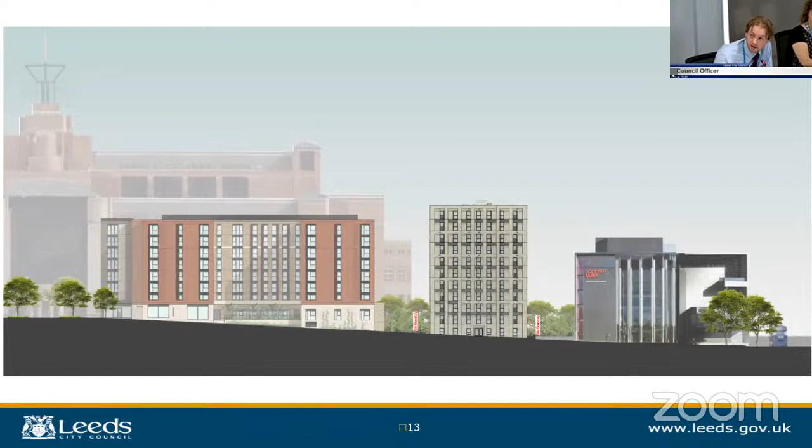So it's the middle drawing in that plan.

And I've included this image as it shows the moulding detail on the infill panel. The applicant is committed to achieving a window reveal depth of 215 millimetres. And I should say we work closely with design colleagues and they consider the latest proposals acceptable.

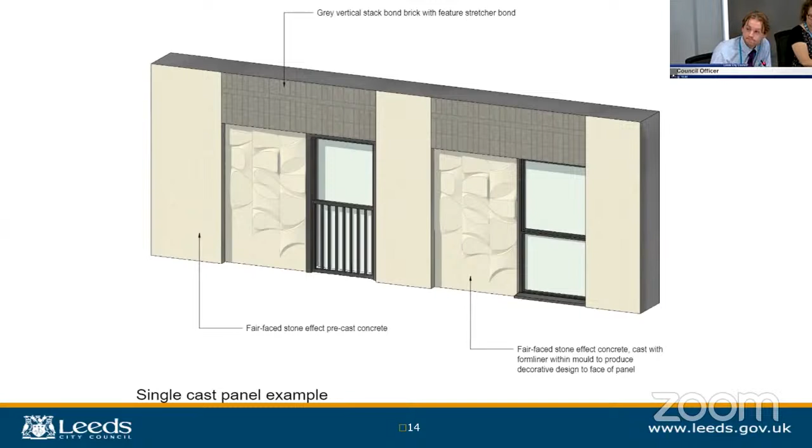As already mentioned, this is a small and constrained site with development on all sides. As such, the separation distances with neighbouring buildings is tight. This is shown in the above image. The application site is depicted in the bottom right-hand corner. You can see there's a red line marking out the application site.

The distance to the Soyo apartment block B is 13 metres and the distance to the facing elevation of Northern Ballet Centre is 11 metres. There is no policy on minimum separation distances between buildings in the city centre, but there's an expectation that development will reflect the character of the area. As you can see, the Soyo scheme includes gaps of 12 and 13 metres to the north.

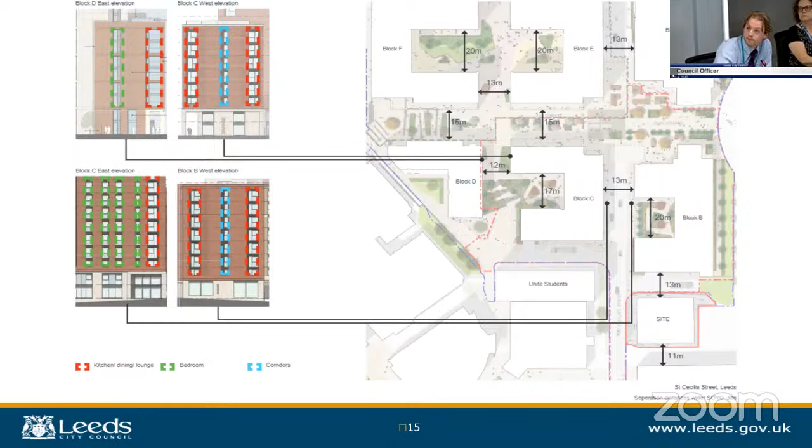Oops. It doesn't seem to be appearing, but there were a couple of photos I took of similar relationships in the city centre. I don't know if it's actually maybe the next slide along. Let me just have a quick look to see if it's there. Ah, yeah, here we go.

So there are also other examples of similar distances between similar storied buildings in the city centre, including Belgrave Street, where the distance between Havana Residence and Simmons House is 11 metres, and between residential blocks A and B at Mustard Wharf, where the gap is 10 metres. There is evidence, therefore, to suggest that future occupants would be accepting of these relationships as part of the wider established character of the city centre.

Moreover, it is considered the potential for any adverse impact is mitigated by the large windows to habitable rooms, which would help to maximise daylight, and the fact most living rooms would be dual aspect and benefit from views looking east and west, where there isn't the same privacy conflicts as shown in this floor plan.

The applicant has also submitted a daylight and sunlight report, which concluded that in the context of a dense urban environment, the impact on daylight and sunlight amenity to neighbouring residential properties would be appropriate, and the development would provide acceptable sunlight amenity.

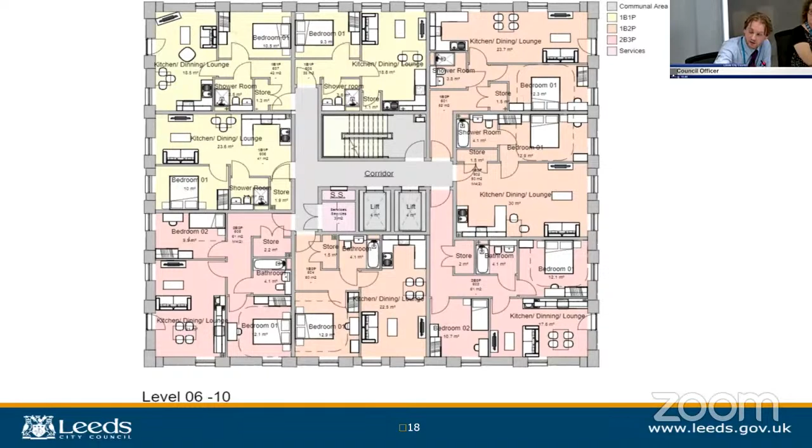I'll go back to the slide that we skipped over, because I just want to touch on the relationship with Northern Ballet Centre.

In terms of the impact on Northern Ballet Centre, I had the chance to be shown around the building this week and looked into all rooms which would face onto the proposed development. It is considered most rooms wouldn't be significantly affected from overlooking because they either serve as offices, which are regarded as a less sensitive use, or are fitted with opaque glass.

However, there is a dance studio on the top floor, which is worth considering in a bit more detail to ensure members are fully informed.

I'm afraid this slide doesn't appear in your printout since I was only on site this week, but the image on the top left-hand corner shows the view from the dance studio. You can see that the top half of the window is transparent with the bottom half fitted with obscure glazing.

The affordable housing block would extend along part of the length of the dance studio and 4 windows would face onto it. This is depicted in the right-hand image, which shows the window arrangement of the proposed development superimposed on the facing elevation of the Northern Ballet Centre.

The facing windows to the dance studio are highlighted red. The top 2 windows would sit above the dance studio, with direct views only possible if a person is up next to the window looking down, and the bottom 2 windows would face onto opaque glass. Officers therefore consider that there is unlikely to be a significant impact in terms of overlooking.

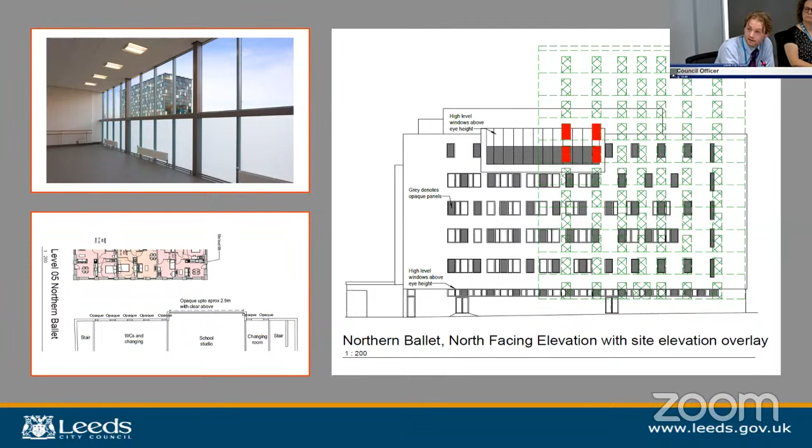In respect to the ground floor, this would contain a reception area, bike and bin store and plant rooms, as well as 3 apartments which would benefit from a small private terrace. Officers initially had concerns about the level of outlook occupants could expect from these apartments, considering they're at ground floor and there is car parking and service roads on all sides.

Let me come on to some section drawings. The applicant has since provided section drawings which show the apartments would likely have an adequate outlook because of differences in ground levels.

On the southern elevation facing Northern Ballet, the apartments would sit on a raised platform with ground level slowly rising as the site slopes northwards. Most of the boundary treatments would have a maximum height of 1.1 metres, which would allow views over the top and the sense of sky and openness beyond.

Where the retaining wall is higher due to ground levels levelling off on the northern side, the affected flat has an alternative outlook to the east side, which would provide acceptable outlook and daylight to the living area.

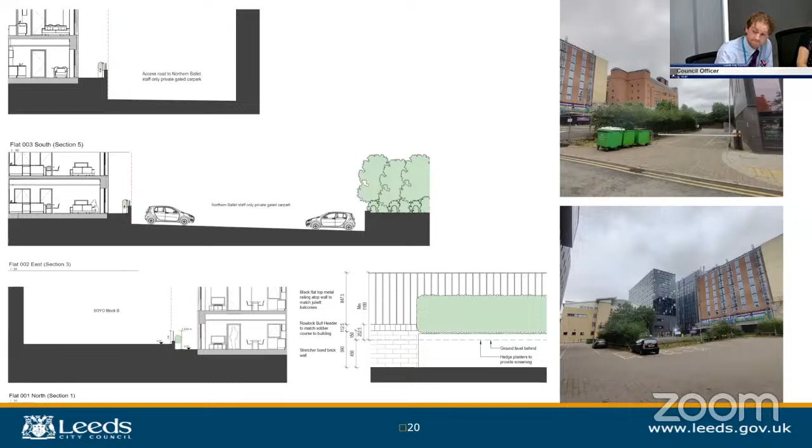Although the development is not required to provide any open space since it falls below the 0.5 hectare size threshold set out in Core Strategy Policy G5, it is recognised the provision of balconies and/or a roof garden is desirable. These features have been considered through the planning process.

However, the applicant argues this is not possible due to cost and management concerns. Despite the lack of on-site external amenity space, other than the small terraces serving the ground floor apartments, residents would benefit from good access to green space within the wider Quarry Hill site, including 0.9 hectares of public realm being delivered as part of the SOYO scheme, which involves a network of interconnecting avenues and courtyards.

Most of the areas would be publicly accessible 24 hours a day. However, the courtyards would be closed between the hours of 11 p.m. and 7 a.m. to protect the privacy of occupants of the surrounding residential blocks.

Furthermore, there are public parks within a 5-minute walk of the application site. This includes St Mary's Park to the north over York Road and green space off Railway Street to the south. The parks provide residents with additional green space functionality and offer a good alternative to the more formal spaces set out within Quarry Hill. The green space at Railway Street also includes an outdoor play facility.

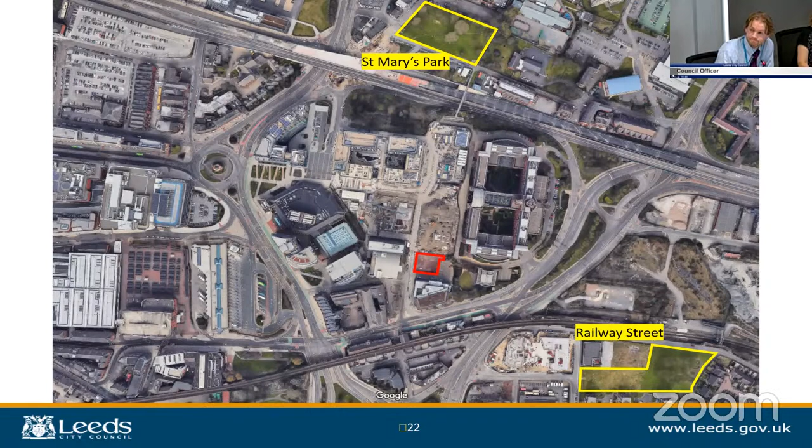On the issue of housing mix, the applicant proposes the following: 46 one-bed, 28 two-bed and 4 three-bed. In percentage terms, 3 beds represent 5% of the total number of units. Although not a policy requirement, since the policy only asks for an appropriate mix, this is clearly below the preferred minimum 3-bed target of 20% set out in Table H4 of the core strategy.

On this point, officers have sought demand data for 3-bed affordable housing within Leeds city centre. In the absence of an up-to-date strategic housing market assessment, which is currently being prepared, data from the annual Leeds Housing Register report for 2022 to 2023 has been taken. The data is on a ward rather than area basis, and since the site borders both Burmantofts and Richmond Hill and Hunslet and Riverside, it was considered reasonable to present data from all 3 wards.

Page 19 of your information pack, paragraph 8.3.8, shows the number of applications for affordable properties broken down by bedroom requirement. The percentage of applications for 3-bed properties ranges from 11.7% to 17.8% across the 3 wards, which is proportionately more than the 5% being offered. However, the data also shows that the greatest demand is for 1- and 2-bed properties, with almost 80% of all applications across the 3 wards for 1 and 2 beds.

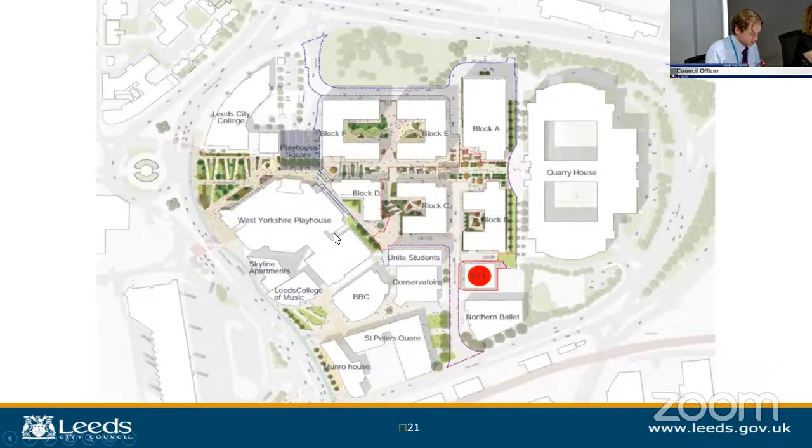I don't know if you could show that on the site plan, John. Yeah, Lewis, if you wouldn't mind bringing up the PowerPoint again, I'll get to that slide. See if I can move it across - it's the ground floor plan, Lewis. If you could just toggle through. Yep, that's the one, yeah.

So it would be this area, wouldn't it? I think where you're proposing some - it just says scrub planting on the northeast corner, where you've got a bit more space to introduce some landscaping. There's also planting around the boundaries as well, so that gives the ground floor units protection on the boundary treatments, to look out on some green areas. We appreciate the green space issue, but with the constrained site and the lay-by, and maintaining the footpath widths for highways requirements, we do have a little bit of planting around the wind baffle as well, just to soften the base of the wind baffle.

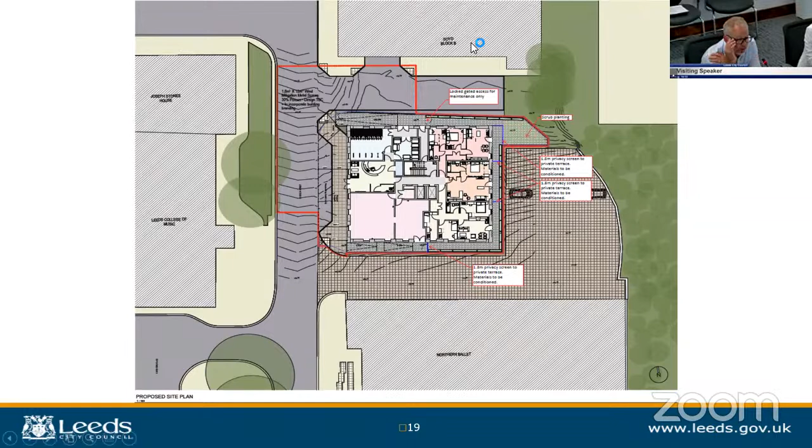If I can add to that, Chair, I think the previous plan shows the site in the wider context. I suppose it's good to make the point that this is almost a piece in the jigsaw in the wider Quarry Hill development, which obviously is now called Soyo. There's been a lot of public realm enhancements as part of that overall scheme, and we're connecting into that through the resurfaced St Cecilia Street, which will then feed you into the wider public realm within Soyo.

And there's a hierarchy of spaces in Soyo that will serve a range of functions, including the more intimate, tranquil spaces within some of the residential blocks. Soyo Block B to the north of us has got a residential courtyard that's got public access during the day, so that will provide a bit of a more tranquil environment.

And then as you filter into Soyo, you've got the main east-west street, which is the bustling, lively public realm area. It's got some functional hard landscape materials as well, which can be used as informal play space. And then you've got Soyo Square between blocks A and B to the north. So there is accessibility to public realm on your doorstep, although we're not delivering it directly on our site because it is quite a constrained plot.

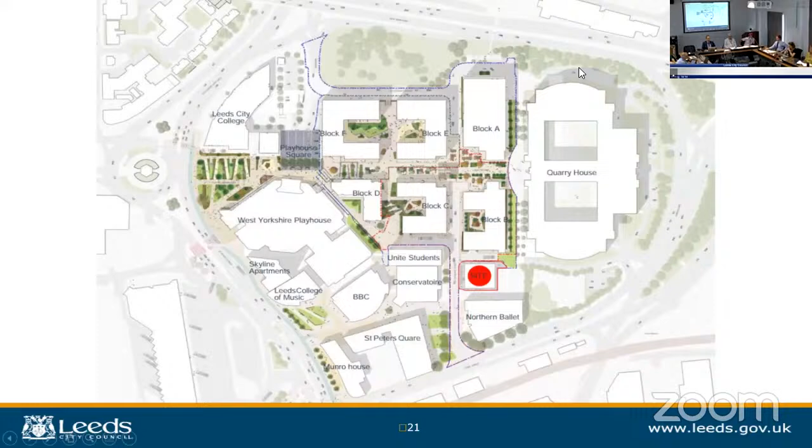Thank you for that. Councillor Blackburn, please. I think... I thought we were having the same trouble not turning on.

Picking up on what Councillor Khan was talking about, there seems to be plenty of green space in the overall area, but it doesn't seem a lot there for children. I know it's been mentioned there's a park, which I doubt has any facilities, just over bordering Munro House. Councillor Khan nodded to that effect, and by the railway there's some facilities, but what facilities have we got for any children that might be in this development, and how far away are they?

Do you want to come in on that, John? If you can. There seems a hesitation, so.

Sure, I think it's a fair point that Councillor Blackburn raises. As shown in the image, you have got that play area at Railway Street, which is a 5-minute walk away. It's a city centre environment, so sometimes getting access to play is difficult. But there's some more seating areas within the Quarry Hill site that could perhaps double up as places for children to enjoy, and some of the courtyard space as well.

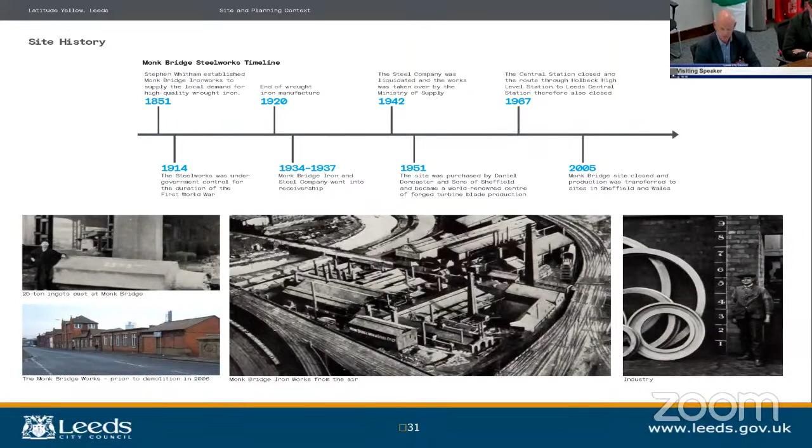In terms of the site history, I won't labour on this, I'm sure you all know, but obviously it's the old Monk Bridge Steelworks. The only thing I would say here is that over and above the extensive surveys we've done to make sure the site is actually deliverable, we have designed the building in such a way that we try to nod back to the existing site use in terms of the aesthetics, and my colleague David will touch on that when we get to that point.

In terms of the site context analysis, you were there today, so you can see that. What we're just doing here is showing you the site along Whitehall Road from the east, the residential towers that are coming up, and the vacant site that we have and are looking to develop next.

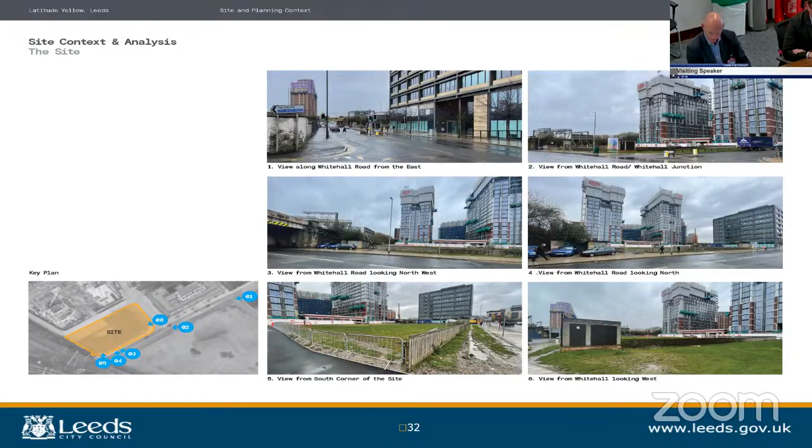This slide shows how the Latitude Yellow site sits within the overall master plan. Latitude Red, as you know, is developed. Purple A and Purple B are largely out the ground and well developed now, and the Monk Bridge site at the back is well developed and largely complete as well.

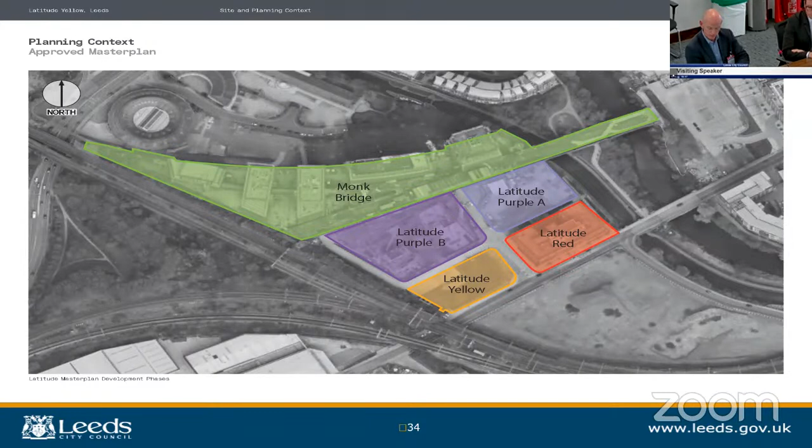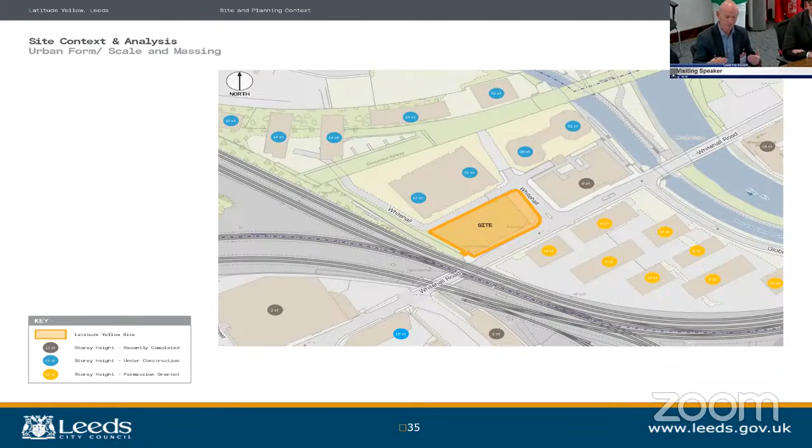In terms of the heights of the buildings, this slide demonstrates residential towers up to 31 stories behind us, and then a mix of 14, 8, 10 all around. What we're looking to deliver here is an office building that is ground plus 11 stories. We previously had an implemented consent for ground plus 9. The building itself, in terms of area, is actually slightly smaller because we're giving so much space away to amenity - the cafe, the shower and changing facilities, the gym, the roof terrace, all of the spaces that we now believe a modern office building requires. So slightly higher to accommodate that, but in terms of net internal area, the building's smaller. We're giving a lot more, but actually making less money for it, if that makes sense.

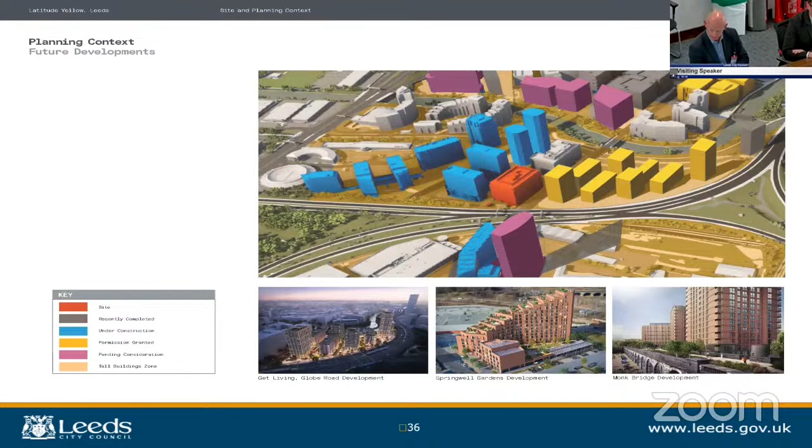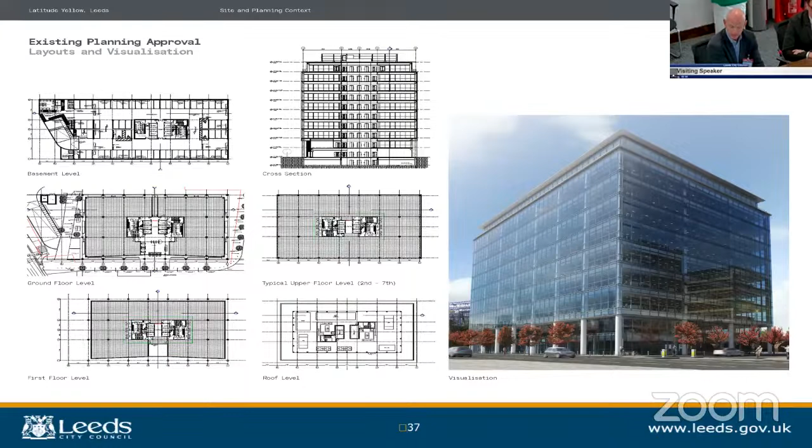This lets you see what the existing scheme looked like - a big glass box. You will not see big glass boxes generally being brought forward by developers anymore, purely because the glass generates overheating in the buildings, which means you need more operational energy to cool them. It doesn't work anymore. So the scheme that my colleague David's going to talk you through, from an aesthetic perspective, you'll see a lot more solidity to the facade, and that's really just to manage that overheating issue that we desperately want to be mindful of and manage to allow us to get the net zero in operation, but also our NABERS accreditation.

Last slide for me is just to touch on the public consultation. We've had extensive public consultation and pre-app discussions with the planning team so far - we've spoken with Leeds City Council planning team, the Civic Trust, local councillors, and we've also leaflet dropped 2,000 neighbours to let them know. The feedback from everyone has largely been very positive, so we have no concerns about how stakeholders feel about the scheme. We hope you feel the same, but David will talk you through that.

Good afternoon, my name is David Shaw. I'm a project architect and project director at Cooper Cromar. I'm conscious that we've maybe overrun our 10 minutes, so I'll make this as succinct as possible.

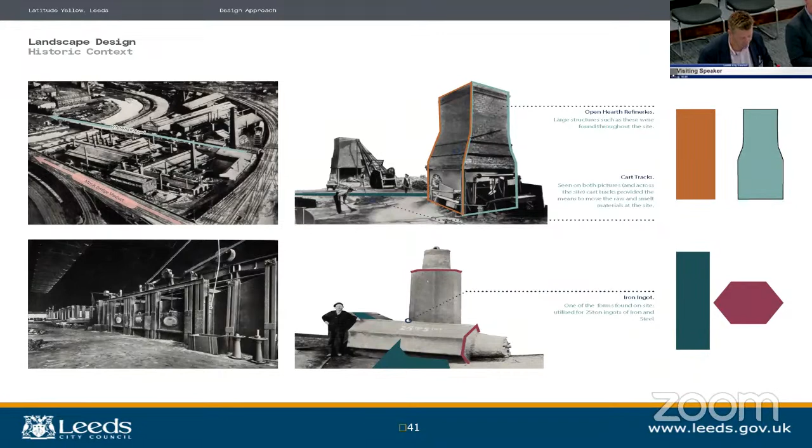The approach to the development draws inspiration and reference from the existing site. It is rich in industrial forms and material - the masonry firing hearths, the cart tracks creating routes to, from and across the site, and the hexagonal iron ingots.

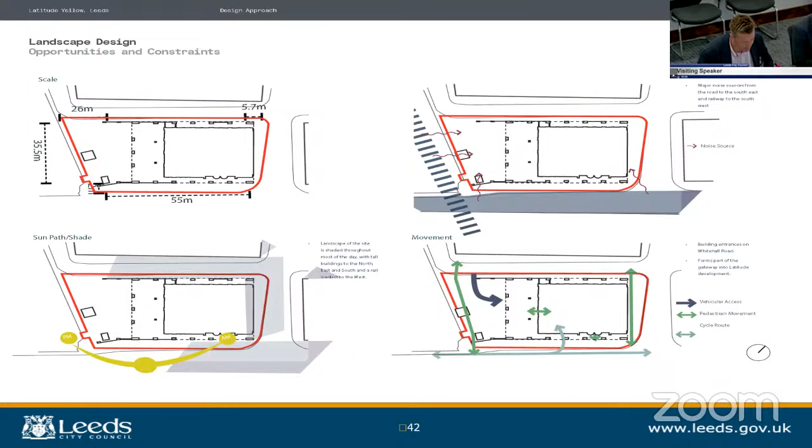The Latitude plot is approximately 35 metres wide by 55 metres long, with the western side following the edge of the Leeds Bradford railway line. Orientated on a north-south aspect, the site benefits from the sun on the eastern and southern facades.

The positioning of the building offers appropriate offsets from the neighbouring developments, either built or unbuilt. On the southern edge, over 17 metres between our building line and the Get Living scheme to the south. On the north edge, almost 16 metres between us and the Purple Bee development. On the eastern and western edges, over 20 metres to the railway line and the Yorkshire Post building. Our strategic approach, pulling back the building from the railway line, is to green the edges, providing shared space on the western edge between the building and the elevated railway line with a mixture of hard and soft landscaping.

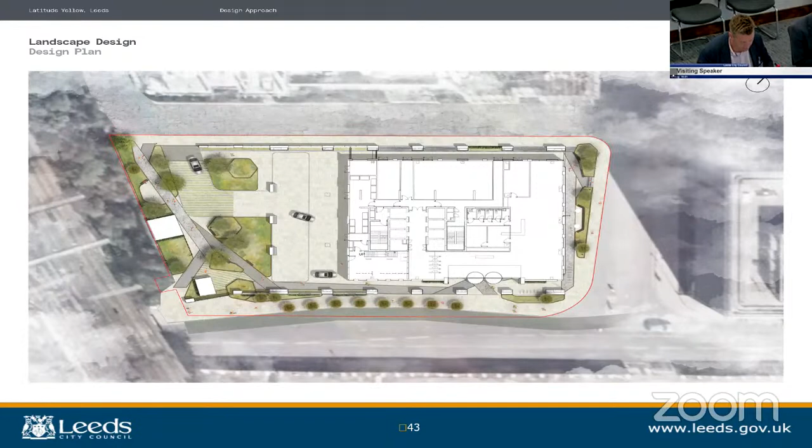The main building entrance is located off Whitehall Road on the southeastern side of the building. Visitors travelling by cycle arrive off the cycle route and into the ground floor cycle store on the west. Pedestrian access is also provided to the eastern edge into the shared public cafe. The western edge affords covered access for 160 cyclists, pedestrians and drivers.

Limited parking, goods, refuse and service delivery are made from the rear Whitehall via the loading bays and the shared access road. The ground floor is set back on the north and south edges in a two-storey colonnade.

The ground floor footprint represents only 30% of the overall site area at ground floor level, and over 40% of that space is dedicated wholly to shared building amenity. Limited ground floor parking, 10 cars and 6 motorcycle spaces, is provided in the undercroft in lieu of an underground basement car park removed from the consented scheme, all promoting active travel.

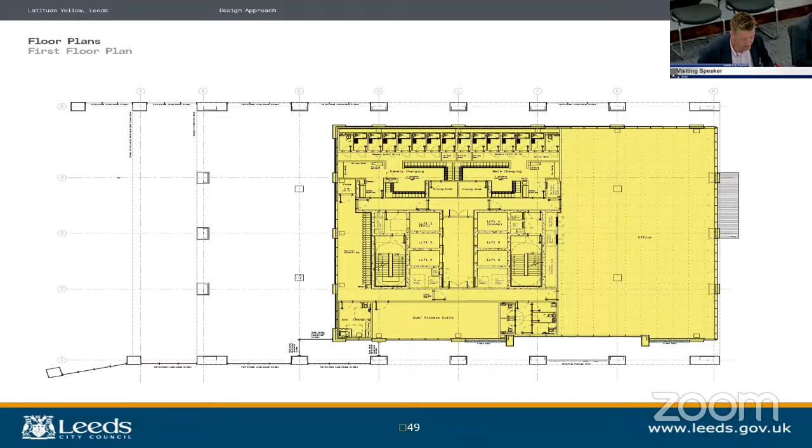The upper floor levels are dedicated almost entirely to Grade A commercial office space, circulation core and associated provision support. The roof level plan offers, once again, further shared building amenity in the multi-use space, the flexible breakout and the external roof terrace, which offers fantastic views at height back east across Wellington Place and towards the city centre.

Green walls and biophilia are spread across the building at the main entrance, in the entrance lobby and on the roof terrace, softening these spaces and adding texture to the building.

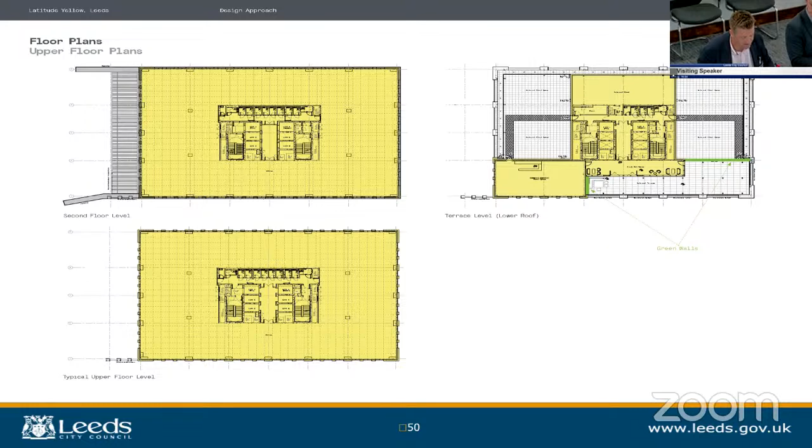Level access and tailored external furniture will ensure a special space in the city for building tenants and their visitors. Tall glazed balustrades will permit views out, but will also provide a degree of protection from the elements.

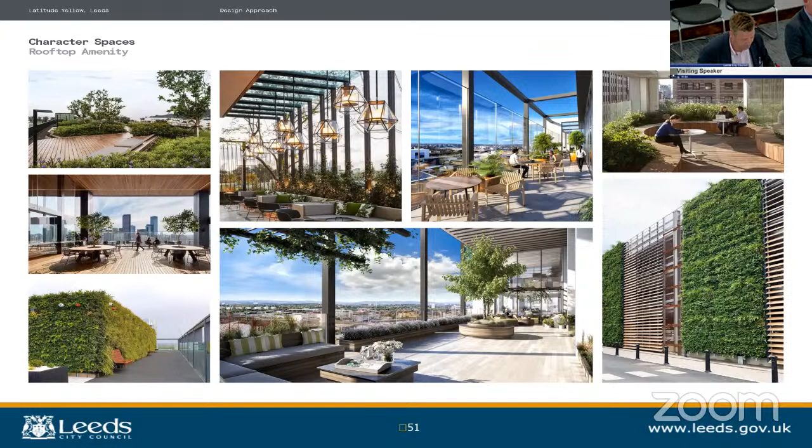The building is arranged over 13 storeys, approximately 50 metres in height. The ground floor and first floor, as we've seen, are almost entirely given over to shared amenity. The omission of the basement has displaced the building's plant over the ground floor and the roof levels.

There are 10 levels of Grade A commercial office space and a single level of flexible multi-use space. Screened plant zones are located cleverly on the north side of the building, away from Whitehall Road.

The building's height draws from the context of its neighbouring properties. The approved Get Living scheme buildings directly south are 18 storeys, with their neighbouring buildings reducing to 9 storeys. This is in keeping with the scale of the Yorkshire Post building and then our building at 13 storeys. The building to the north, Purple B, rises again to 17 and 18 storeys, and on the southwest, Springwells Garden building is 16 storeys.

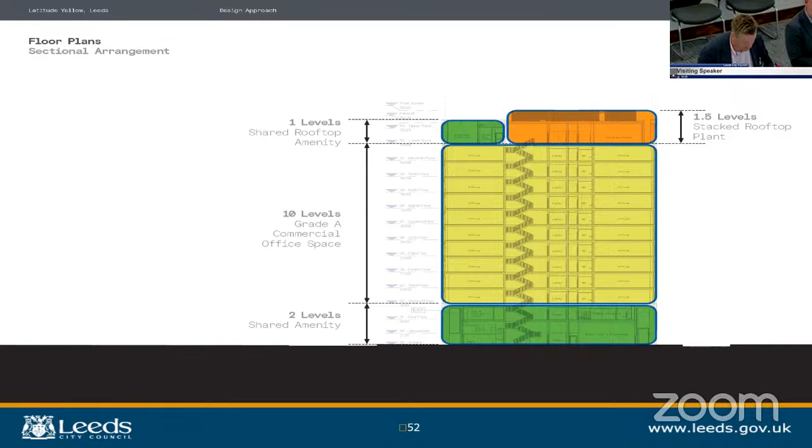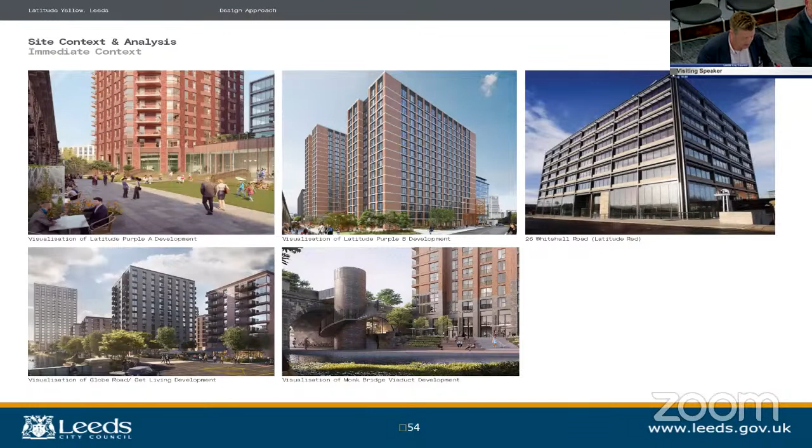The building considers its immediate neighbours, constructed, pending consent, or determined. Our building seeks to complement the rich and diverse mix of architecture in the immediate environment. The wider context of the central commercial district also offers points of interest and reference.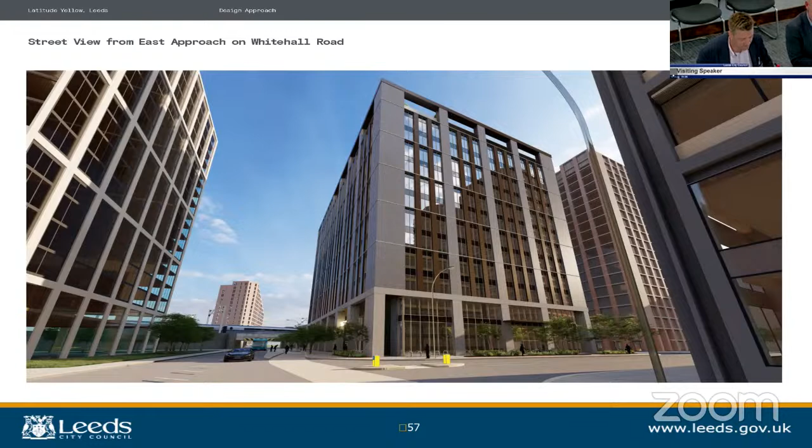Next slide, please. A weighted, regular and rhythmic lower building plinth and frame articulates the ground and first floor setbacks, creating a more civic approach to the street.

Next slide. A simple and elegant upper elevational response is delivered with thin horizontal banding, strong vertical dark masonry elements and lightweight metal infills with an articulated crown detail.

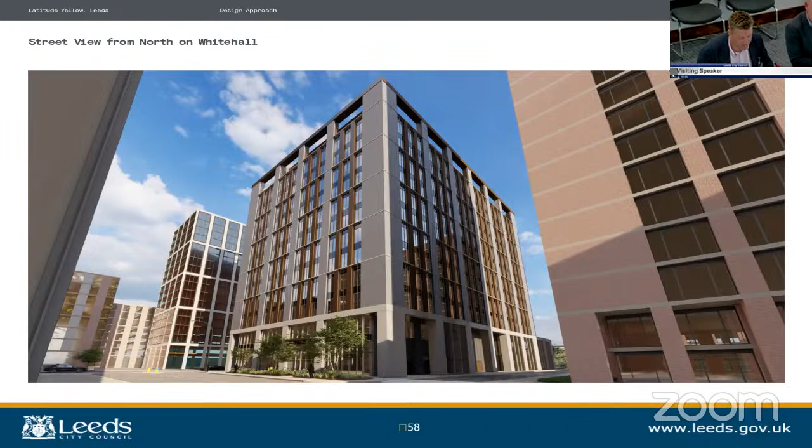Set to a rhythm across the facade, these repeat on a brick, glass, metal, brick pattern with a full brick deep reveal. Next slide, please.

The southwestern corner incorporates metal perforated panels integrated into the overall composition of the building, assisting with wind mitigation.

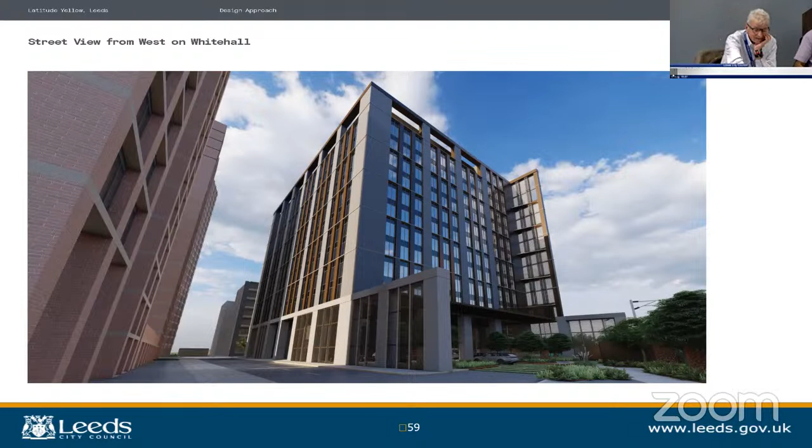Architecturally, our building completes the master plan development with an exemplary confidence. Considered and progressive, it is a worthy full stop to the redevelopment of the former Monk Bridge site in Leeds. Thank you.

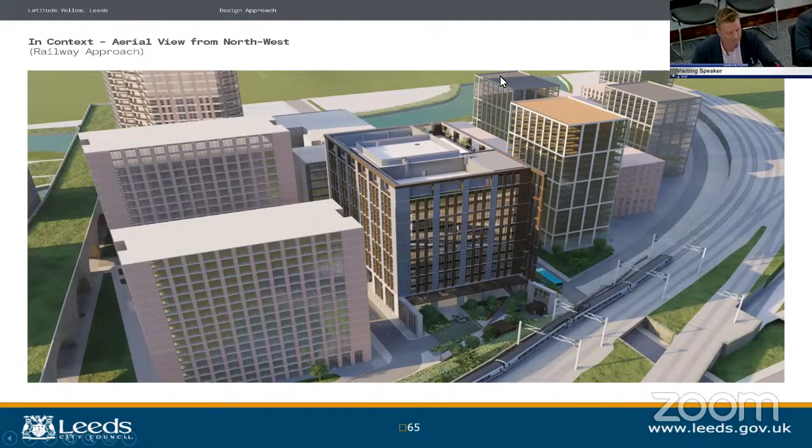Two questions, and one was about a slide that you didn't have the opportunity to talk to. So could we just go back until I recognise it again? It's the few you skipped over at the end.

No. Yes, there. Where's, I don't recognise where that correlates with the plan. That's the new roof terrace proposed.

Oh, the roof terrace. At the top of the roof, what you can see there is the two green walls that we're looking to introduce with planting, and that looks back towards the city. Right, okay, I get that.

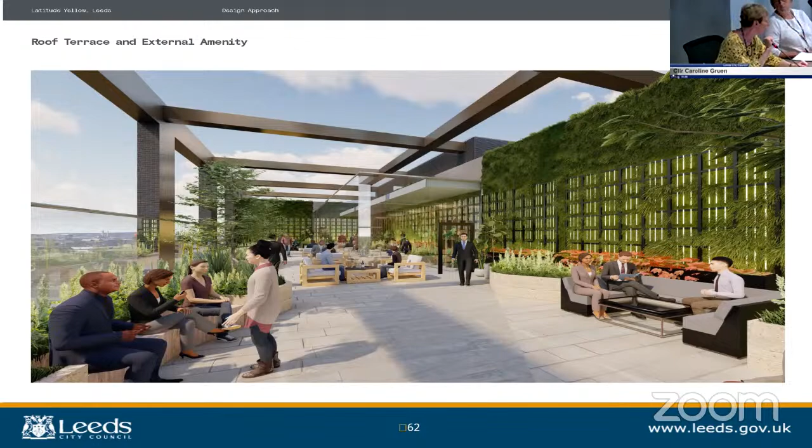And then towards the beginning, where you were showing the plan of the site and the cycle and pedestrian ways through, could you just flick back to that?

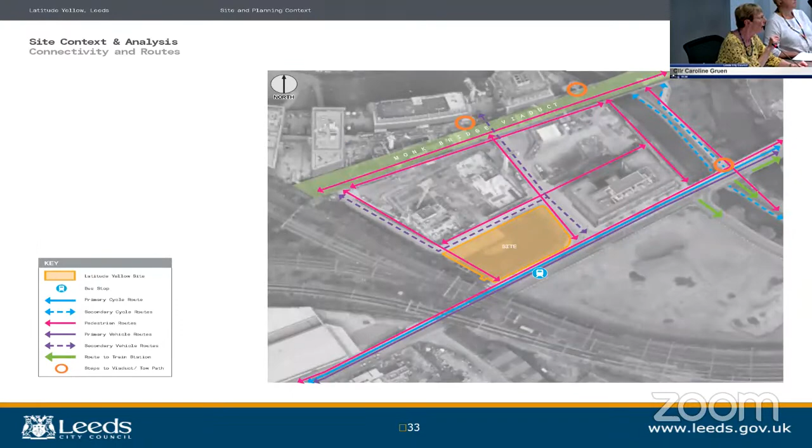No, it wasn't that one. Wasn't that one either. It was the one we looked at on site this morning. I think it's the ground floor. That's the one, yes, that's the one.

So I couldn't quite work out how a pedestrian gets from the southernmost border of that plot of land to the northernmost. I can see a red arrow and I can also a red line. I can also see blue lines. So would the pedestrians walk along the cycleway until they reach the red line? How does that work?

So what you're seeing on the left hand side of that drawing there, the pink and the blue are essentially hard landscaping. So they are a route, but they are not the dedicated cycle route. This dedicated cycle route runs across the front of the building. That's the sort of light blue dashed line.

So what we're seeing there is that there are a couple of options for someone arriving by cycle to get into what is the cycle store in the bottom corner. However, they could still take that left hand side route up and through and onto the pink line and up north onto Whitehall if they're coming through the garden space.

If they're not coming through the garden space and they're coming from the eastern side of the site, then they're more likely to come up the west side of the east side of the landscaping. It's shared space, so either or will share the same landscaping into and around the building.

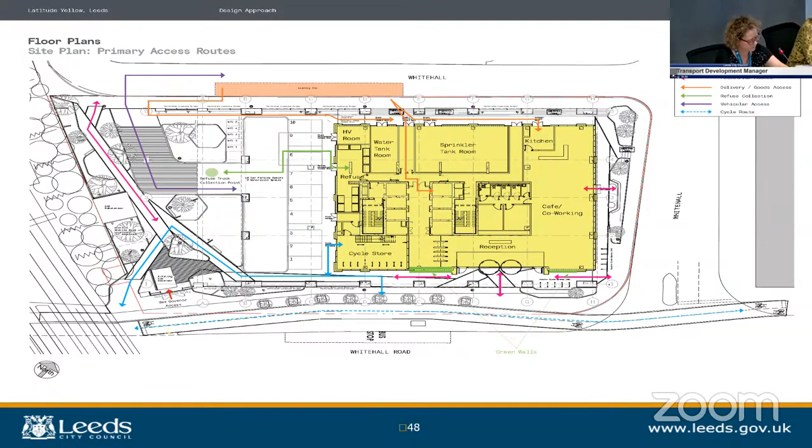Thank you, Chair. I think it'll be really helpful in future if we can have some design so you can indicate the master plan for the carriageway, because this morning the carriageway was a busy road, and I think the footpath and the cycleway - I know you have assured us the trees are going to make sure they grow above the way outside here. But in my opinion, if you've got a pushchair, if you've got two-way people coming, it'll be difficult for people to cross. So I think that needs to be considered.

And finally, what relationship do you have with the rail network? Because the bridge is just to the side of your development, and it just needs a lick of paint as well, actually. So definitely will bring that up.

I suppose two things. One is we're very much looking to work with Leeds City Council to meet the aspirations of the cycleway or the shared space, whatever that ends up being in that full strategy. We're working to accommodate that as much as we can, and when the final scheme becomes clear, we'll look to try and work with them to implement that as far as physically possible.

In terms of our relationship with Network Rail, we've made contact with them to start that engagement. They are actually one of BAM's biggest clients, so we're hoping that we get a reasonable audience with them to have a discussion about that. Whether that leads to us touching any of their assets, we don't yet know. We're very early in the dialogue, but we'll keep that in mind and we'll mention that.

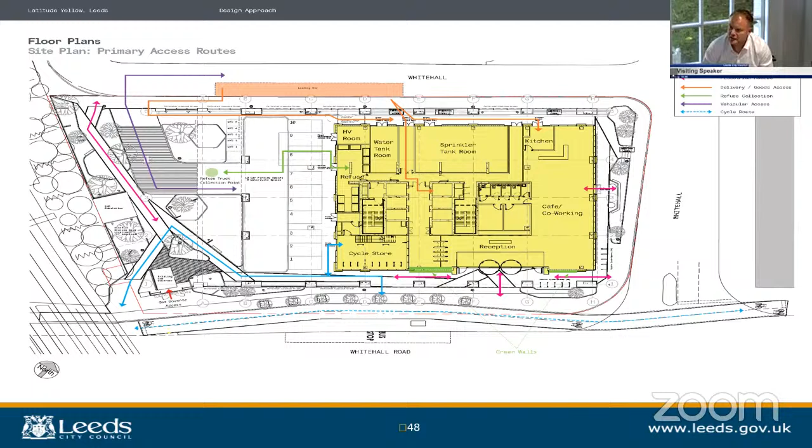In terms of planting, I think the words lush and verdant have been mentioned. The aspect lends itself to open sunny positions, but there are elements of shade tolerant plants that will be required, referring to right place, right plant. We've done a lot of work to provide connectivity between those planting species, so there's continuity between what goes on the green wall and the horizontal planting as well.

In terms of security and open access, it's not a gated area of green space. The idea is that it's a transient space - people can sit and dwell within it, or they can choose just to walk through as a shortcut, but it is an open space.

I would add to that, that the building will have extensive CCTV coverage, and the building itself will be manned with 24-hour security. So there is an on-site presence 24 hours in the building.